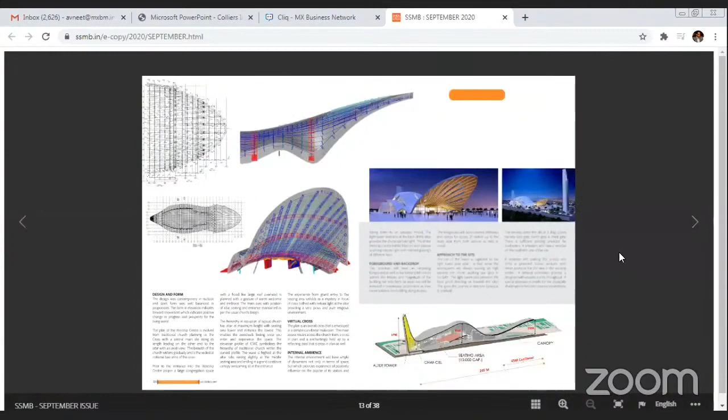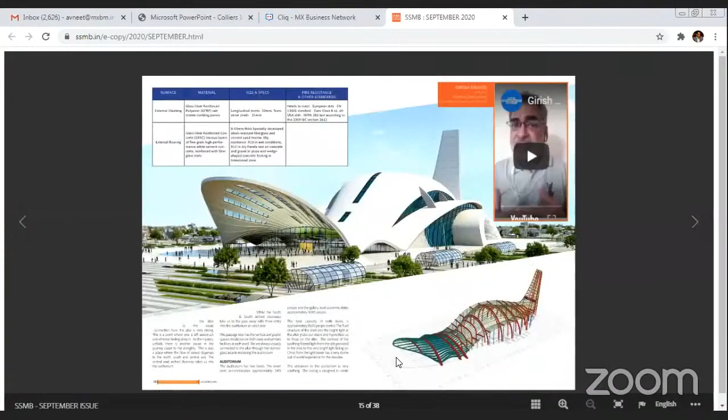Thank you. Good evening, friends. I must at the outset congratulate MX Media for coming up with this brilliant idea to have a webinar on industrial structures and the development so far. The speakers today are really a galaxy of experts from our country, which include Dr. Srinivasan, Mr. Pingle, and Mr. Murthy. So, good evening to you, sir.

Good evening to you. Friends, industrial architecture and industrial construction has really gone on a big journey over the past, let's say, about four decades or so. We had simple regular northlight trusses that we used to see in industries, regular trusses which are now replaced by portal frames and even advanced structures like space frames.

The AC sheets, which used to be a very common thing for roofing sheets, has been changed to Galvalume, Zincalume, and also sandwich panels. From conventional fabrication, we have now moved on to pre-engineered buildings with a tremendous amount of workmanship happening in the factory itself, and then the erection. We have the development of codes accordingly, whether national or international codes that we follow, which are correlated to the developments that happen as far as construction is concerned.

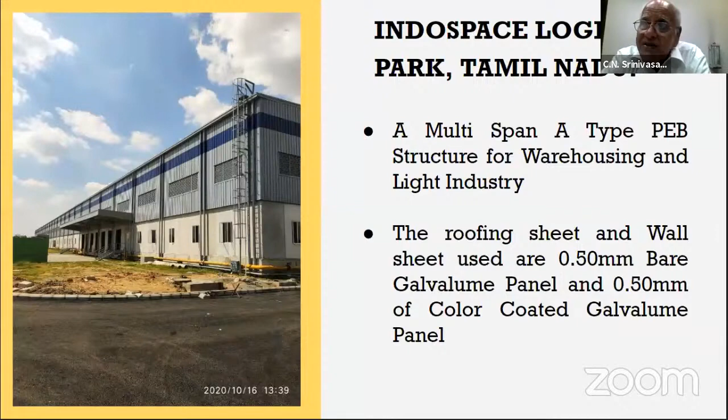Now, almost all warehouses are designed on the basis of MBMA standards. They do not follow the Indian standards. That would mean in terms of live load, in terms of wind load, in terms of the stresses, in terms of the serviceability limits.

Those of you who have had time to see that bulky National Building Code document, half of which is junk and the other half is fit to be thrown in the dustbin, it has some very penal provisions. The penal provision says that anybody who does not follow the National Building Code, or who prompts others not to follow it, is liable to be prosecuted, license cancelled, and debarred for life. Now, this is a clause which is draconian in nature and highly unenforceable. It's a meaningless threat.

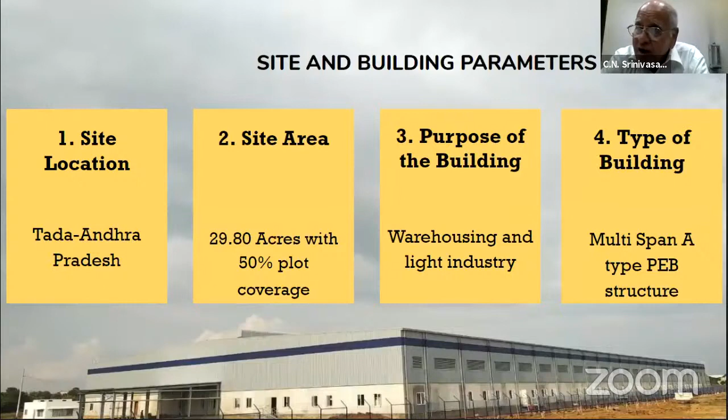Therefore, the steel design, fabrication, manufacturers, and end users should join a campaign to develop a special code applicable only to warehousing operations. I may say that over a decade back, the Department of Science and Technology and the Indian Standards Institution, or Bureau of Indian Standards as it's now called, were trying to develop a code for heavy industrial structures. Correspondingly, we should apply for light industrial structures. As far as education and research institutions are concerned, we should address developing a ready reckoner or typification of structures. Again, the Department of Science and Technology and IITs, particularly IIT Madras, brought out several handbooks on typification of industrial structures with crane, without crane, standardization, modular construction, and so on.

To the fabricators, what it would mean is that they should mechanize, reduce dependence on labor, standardize simple connections, and overall simplify the fabrication system so that at site not much of a high-grade technology is called for.

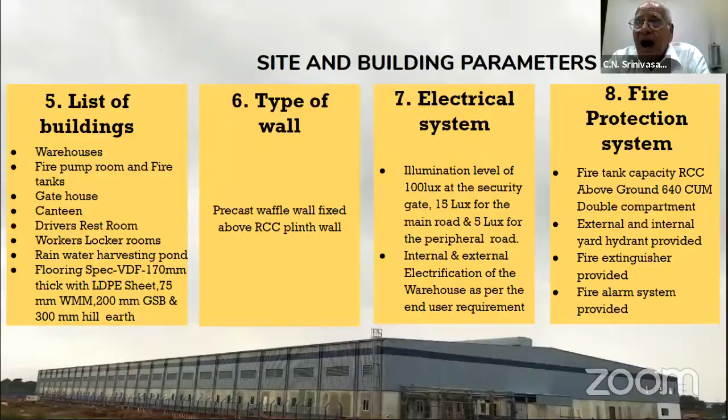Some of which is not entirely in our hands. Some of it is because of the atmosphere we are working in, some of it is because of the changing needs of the customer. And the life of the building, on paper, is at least 60 years. I have seen steel buildings that are still in place, built by our organization in 1947, doing wonderful work even today.

I thank you for a patient hearing, and I'll be happy to answer to the best of my ability whatever questions may crop up during the deliberations. Thank you very much.

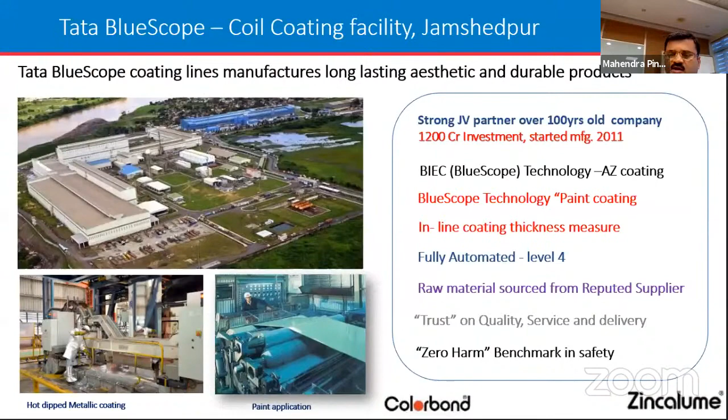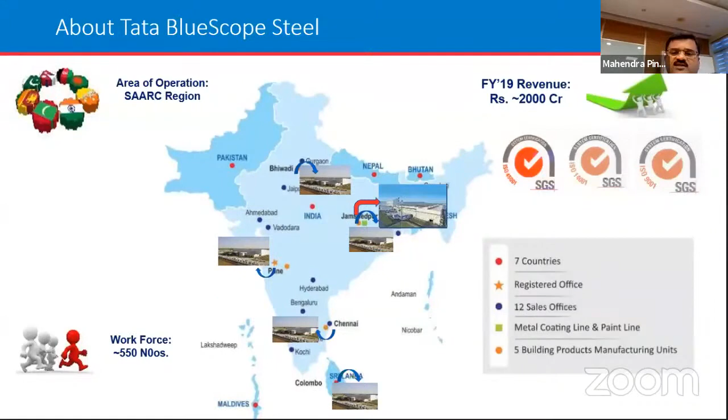We have roll forming operations around India - we'll not go into detail. The main plant is in Jamshedpur, where we manufacture Zincalume steel and Colorbond steel. Normally you can see most PEB buildings, or typically in projects, they go for Zincalume roofing on top as a roofing material.

People prefer color coated steel for wall cladding to give it more aesthetics. So what is this Zincalume steel? This, as I said, is invented by BlueScope, which is the BIEC technology, in 1976.

Zincalume steel has a differentiator. It is different from the galvalume or aluminum zinc color coated steel offered in the market. It has an anti-darkening property. So whenever you use Zincalume steel on the roof, it doesn't have the darkening property. It looks good, and the luster keeps for a longer time.

Because of that luster property, you can get more thermal reflectivity. Our Zincalume steel gives an SRI value of 63.

Speciality of our product is we can give equal coating on top and bottom side, so that whatever corrosive impact is generated during the process, or coming from outside, is addressed. Equal coating is very well backed with the warranty, so you will have peace of mind that there won't be any problem. Whatever happens in the future, Tata BlueScope Steel is always there to support on these things.

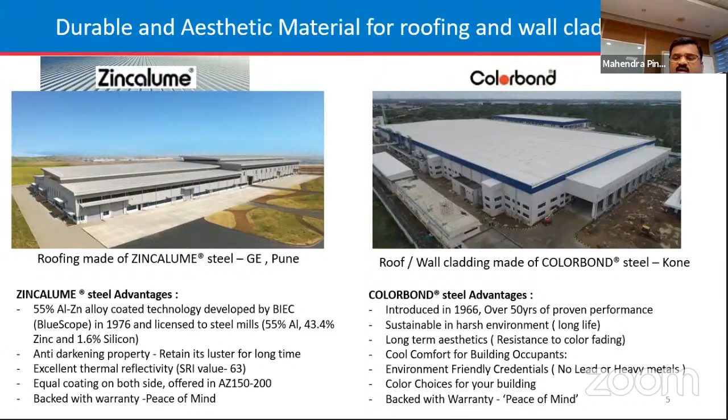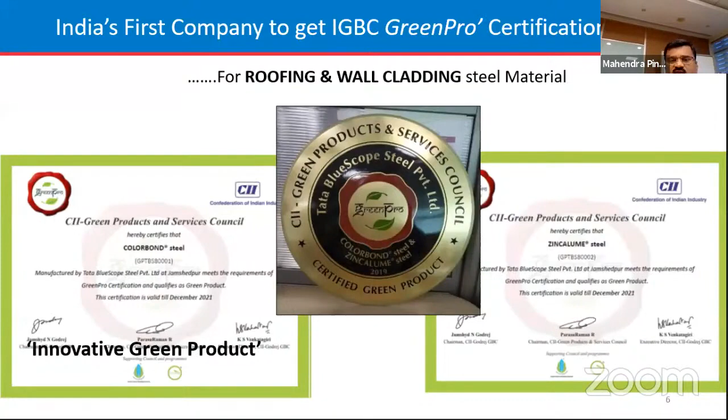Again, Colorbond steel has peace of mind, supported with warranties. As per green building points, the CII and IGBC certify products as green. In India, among color coated and metallic coated steel products, Zincalume steel and Colorbond steel have been the first green certified products, because of benefits like less or no lead content, being environment friendly, low VOC, and complying with green requirements.

Talking about architectural applications, metal cladding has to take care of whatever structures architects are designing. You can see this type of structure built in Australia with very stiff bullnose type curves, and the metal cladding is suitable for this, being pre-painted steel - that's Colorbond steel. Whenever you are curving or crimping, there won't be any problems in color performance or cracking.

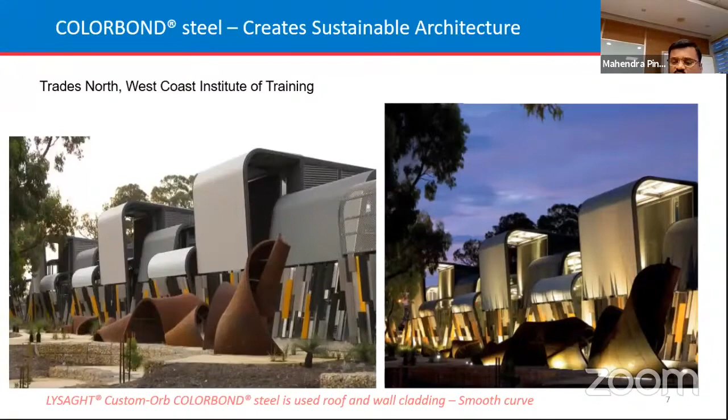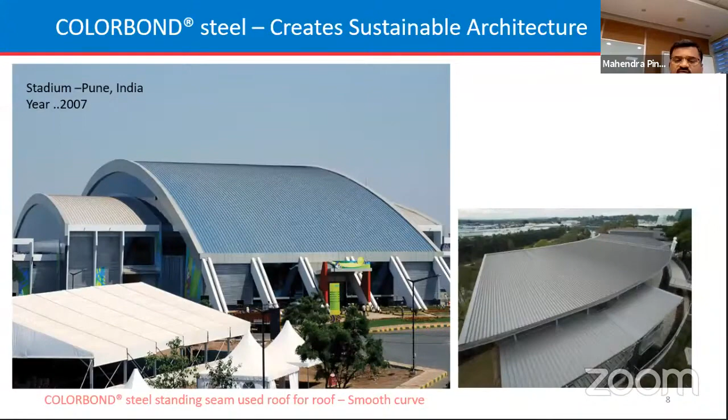So it gives good performance in flexibility. This is not limited to institutional use - it is also suitable for infrastructure projects, stadiums, metros, railways, all sorts of things.

Nowadays PEB buildings are designed not only as box structures. Architects are designing with concave and convex type structures, providing aesthetics by adding curvature that adds value to the structure.

Nowadays cyclones and natural calamities are happening, with wind speeds going to 200 plus kilometers per hour, and there are different types of cyclones India is seeing nowadays. In such cyclones, metal cladding, as Sir mentioned, can blow off. So there is a requirement for material with inbuilt strength - the cladding material has to be very strong.

It has to be strong into that. That's why you can go with a high rib type of profile, or locking type of profiles, or standing seam type of profiles. The profile has to withstand that type of pressure, wind pressures.

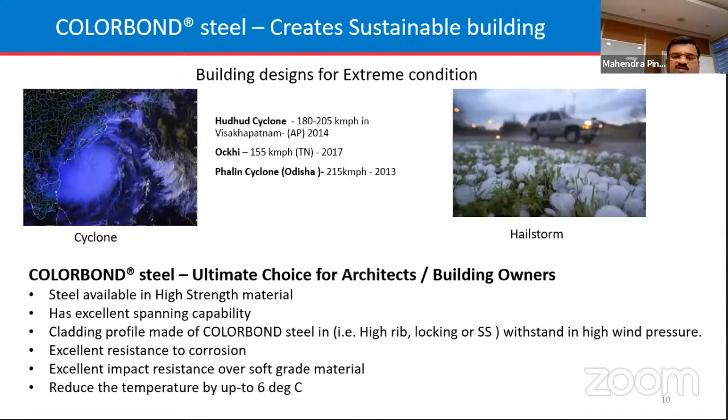And whatever Colorbond steel we are offering, it is sustainable, and it protects the investment whatever is there inside. So it is sustainable buildings by using Colorbond steel.

Other than that, this industrial sector, this is severe marine or industrial type of environment, or heavy industrial sectors where fumes are generated, sulfur dioxide coming, different fumes are generated. Then in the coastal areas, where there is high content of chlorides, the material has to withstand.

We have the product called Colorbond Ultra, which takes care of severe environmental conditions and gives higher durability of the product. It has a special treatment given on the Zincalume steel, which has high content of strontium chromate in the primer, and the paint is also specially designed to withstand high UV and these things.

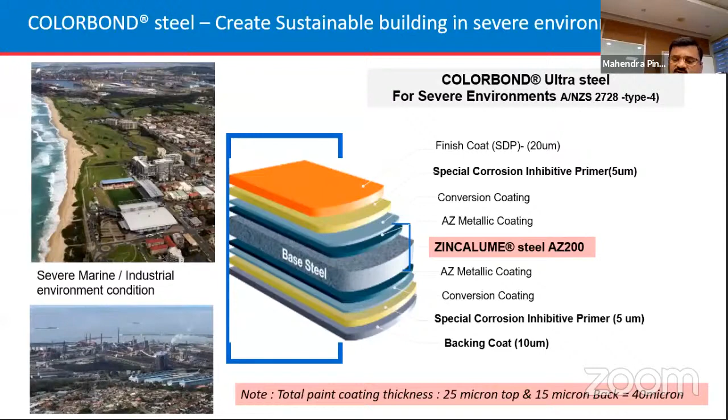Talking about sustainability, nowadays so many buildings are built for more than 20, 30, or 40 years, so the cladding has to be replaced.

Nowadays people talk about replacing the existing roof with new material, so you don't need to remove the existing sheets. You can go with retrofitting, putting new sheets with insulation or other things on top of it. So you can protect your investment, eliminate the tear-off of your old roofing material, and reduce the amount of wastage going into landfills.

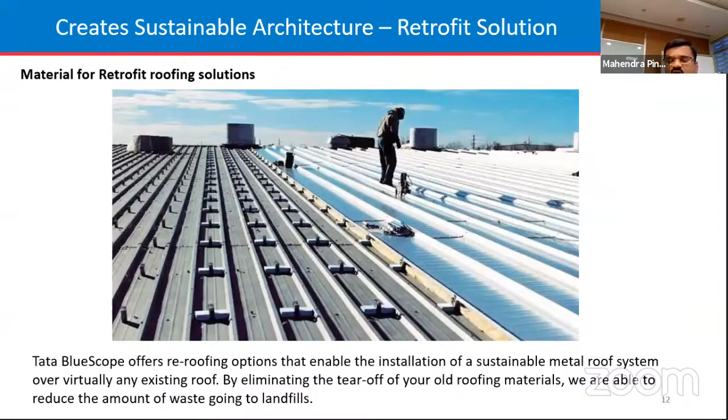So this sort of thing is very prominent nowadays. Colorbond steel gives durability - excellent corrosion resistance and excellent color fading resistance. So you can talk about the aesthetics.

We talk about 20, 25 years, but we give a warranty for 10 years. Not only limited to 10 years, the product can withstand more than that. So that is what Colorbond talks about regarding aesthetics - you will have the color performance for a long time.

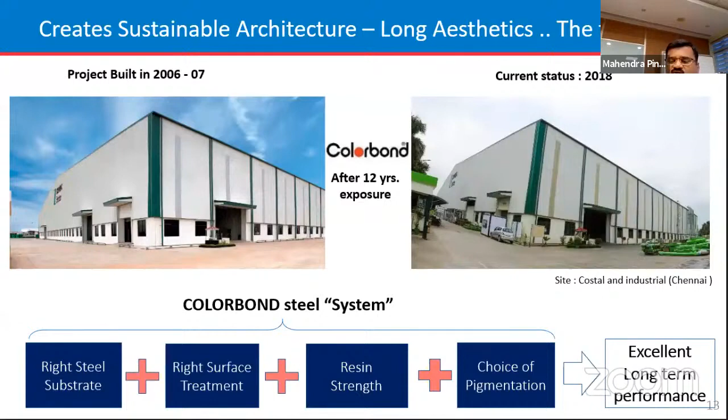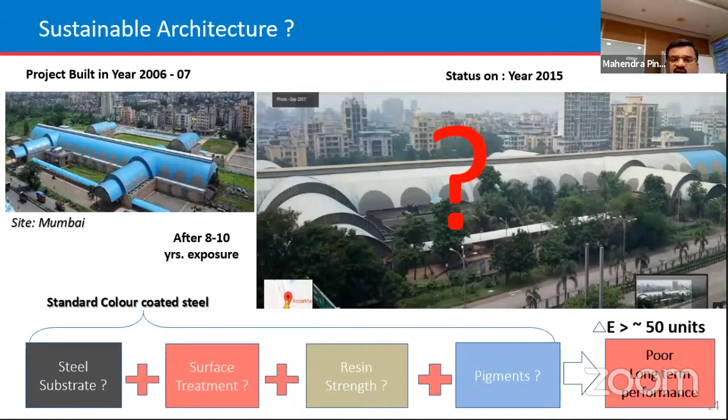So the alternative, or option, to that is Colorbond steel, which does not have any problem over a period of time.

Excuse me, Mr. Pingle, I think we are running short of time. Yeah, we'll finish in 5 minutes time, sir.

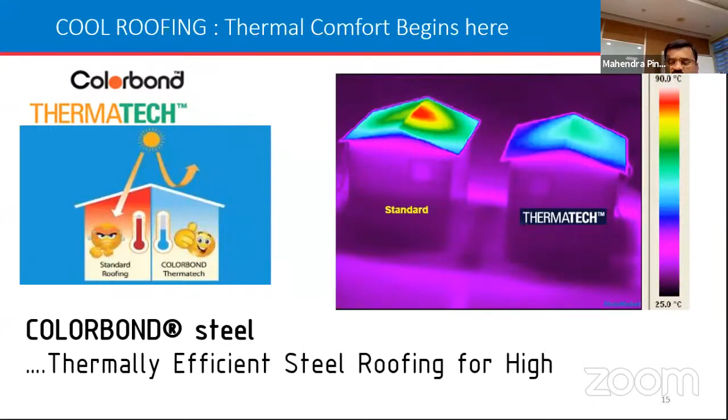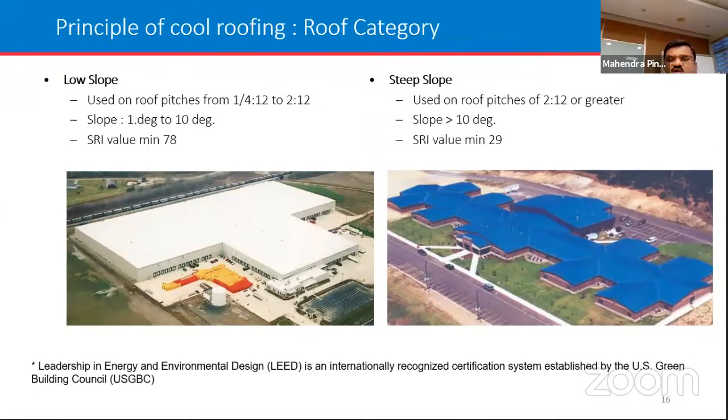So this sustainability is about the Thermatech technology, we talk about cool roofing. You know with cool roofing, the SRI values - if it is a low slope building, you have to have 78, and if it is steep slopes, the SRI value has to be minimum 29. Color bond steel complies with that.

So the phenomena of cool roofing is higher reflectivity and higher emissivity of the product. You will get lower heat gain inside the building. That's the white body, black body concept - this is actually the purpose behind it.

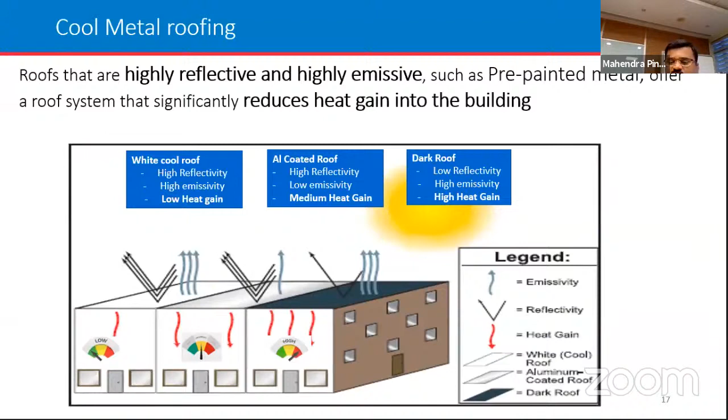So if you compare Colorbond steel with other material, you can see the white color here with the Surfmist and the ordinary color. Our SRI value is 87, and ordinary color of similar matching is 75. If you convert this SRI value into roof sheet temperature, Colorbond will have a 5-degree difference between the ordinary color and our white color.

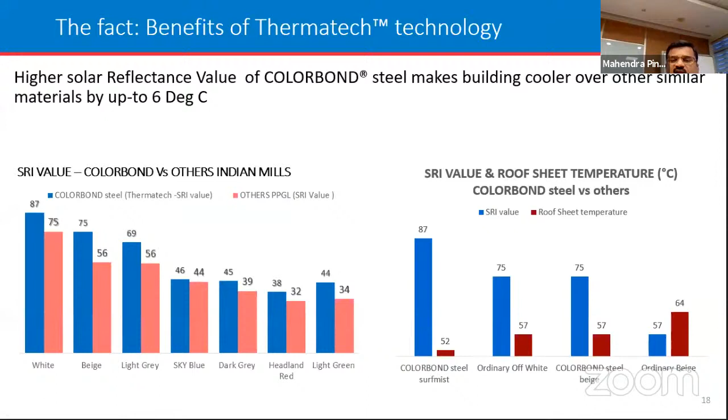Similarly with the beige color, the ordinary color has a higher temperature than Colorbond steel. So this is what the Thermatech technology in Colorbond steel gives - about 5 to 6 degree difference, and you can have 15% electricity saving.

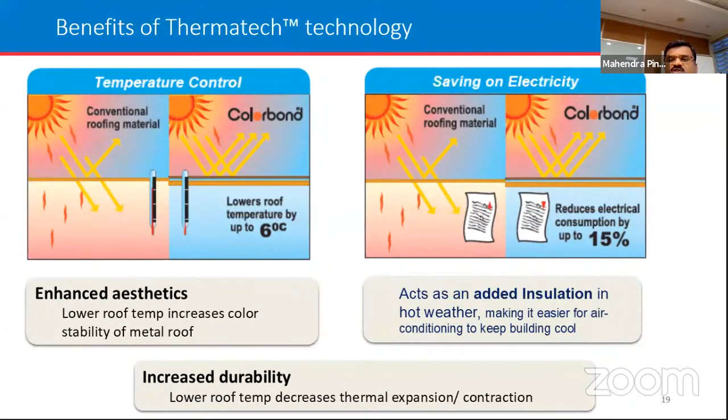Because of the lower temperature the sheet is getting, you will get lower thermal expansion and contraction. So with lower thermal expansion and contraction, the roof sheet durability is very high. It can last longer regardless of the temperature.

Talking about green building, you can see it's energy efficient due to the higher SRI value. If you go for green certification, that will give approximately 4 points. If you talk about material conservation, our steel is 100% recyclable, provides long life, and low maintenance.

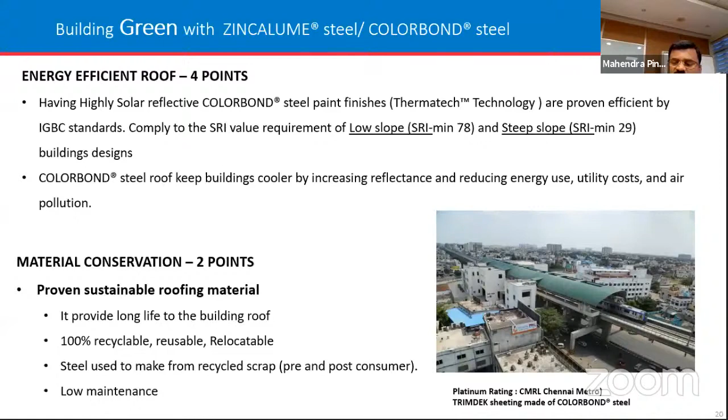We are using scrap during the manufacturing of the steel. So whenever you comply with that, you will get 2 points, and COLORBOND steel or ZINCALUME steel complies with that. Talking about water conservation, environmental quality and occupational health, that contributes 10 points.

COLORBOND steel doesn't have any lead pigments or hazardous chemicals in it. It does not release pollutants. And since it is made at the factory in Jamshedpur, while your building sites are in various locations, local air quality issues are not there. This normally happens in field painting, but in COLORBOND steel it never happens.

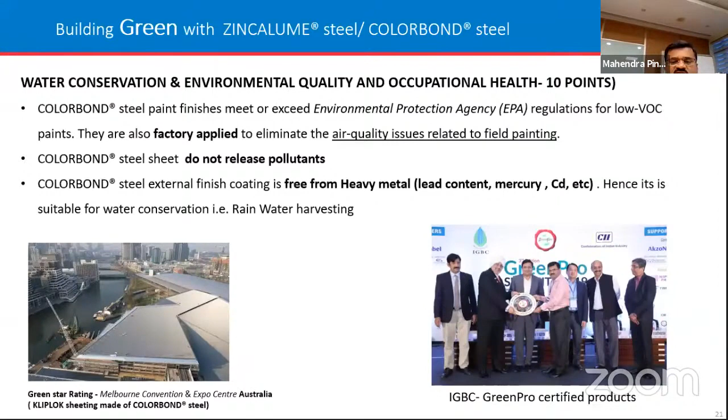So it is a green star rating building, which is there in Australia, a 6-star rating. So we got this surface.

Talking about the end of the presentation, Tata BlueScope Steel, BlueScope, and Tata Steel always talk about sustainability and innovation. What is meant by sustainability? It's about social responsibility, environmental responsibility, and socio-economic responsibility, and all three factors have to be balanced to have balanced performance, and that's how the product has to be developed.

If you talk about the social part, society is an important part of it, along with product development, product responsibility, labor practices, and human rights. If you talk about environment, there is energy, water, material, emission, effluent, waste, and transport, all important parts of it. If you talk about economics, direct impact, market presence, and procurement practices all come into economics. If all three factors are balanced, your product will be sustainable.

It's talking about the life cycle: get, make, use, and next. If you get the product from the right source, design it, use it in the building, then you can recycle it. That is what get, make, use, and next means.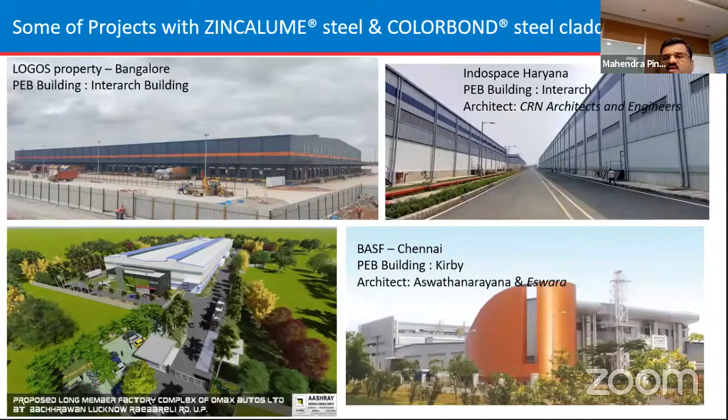And IndoSpace, CRN Architects, and all these firms are valuing the importance of cladding materials. All the architects now know the importance of cladding material in buildings, which is really nice, as they are considering the right product for their buildings. And that's the end of my presentation.

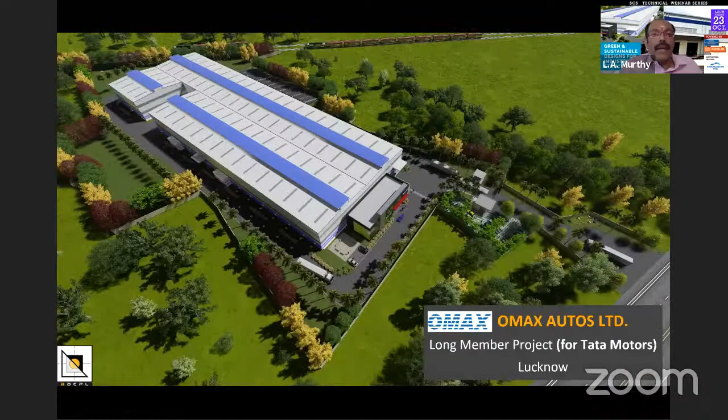We have recently completed a fully automated long member project for Omax Autos Limited at Lucknow to fulfill the requirements of Tata Motors.

This is the architect L.A. Murthy. I have done my bachelor's from MANIT Bhopal and EPBM from IIM Lucknow. I started my career with an esteemed steel building project for Maruti Udyog Limited, Gurugram, way back in 1991. Subsequently, I founded Aashray Design Consultants Private Limited, popularly known as ADCPL, based in South Delhi.

ADCPL was founded in 1991. As the managing director, I have been mentoring and guiding my team for the past 30 years. We have handled more than 400 industrial and warehousing projects on a pan-India basis in the past 3 decades. Some of our prestigious clients include Omax Autos, JBM, JSW, Tata Motors, Hero Motors, Munjal, Sandhar, Caparo, Kailash Vahan, DispoSafe.

Mahesh Edible Oil, and MNCs like Suzuki, Yokohama, Daikin, Jiken, Bata, etc. Since we also have Tata BlueScope in this panel, we would like to candidly share that we are their sheeting's largest consumer in Northern India since 2006.

Today, we are going to showcase one of our esteemed projects, the Omax Autos Long Member Project. Omax Autos Limited is one of the reputed automotive component manufacturers in India. They decided to set up an exclusive, fully automated plant for Tata Motors to manufacture long members for trucks and trailers. As per the internal process flow for setting up the entire manufacturing unit, the primary requirement was a 200-meter long shed in 2 bays of 30-meter width.

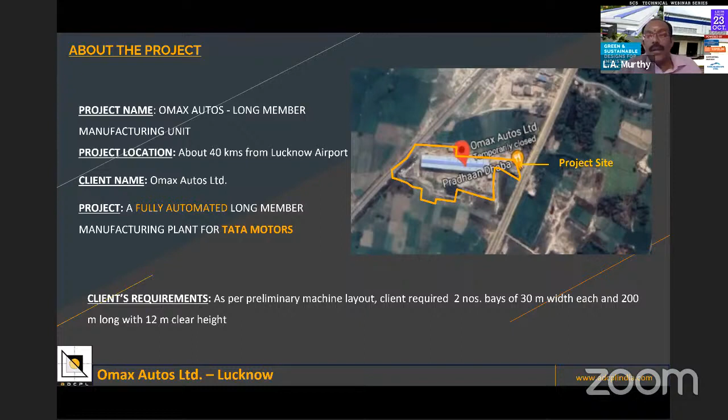That site is located on the Raebareli Highway, about 40 kilometers away from Lucknow Airport. The site area is about 9 acres and a built-up area of 1 lakh square feet is completed in phase 1. The second phase of 50,000 square feet is in progress. Our scope of works in this project includes architecture, structure, plumbing, firefighting, interior, vastu, landscaping, automation, green building, and project management.

We assisted Omax Autos with various approvals. Now let's start with the architectural design part.

We had associated with Omax Autos right from the land acquisition phase, based on their requirement and multiple land bank options with various constraints. We explored numerous conceptual schemes and finally we ensured the selection of an appropriate site location, then developed a schematic sketch considering all the relevant guidelines. The particular land parcel is located between the National Highway and railway lines.

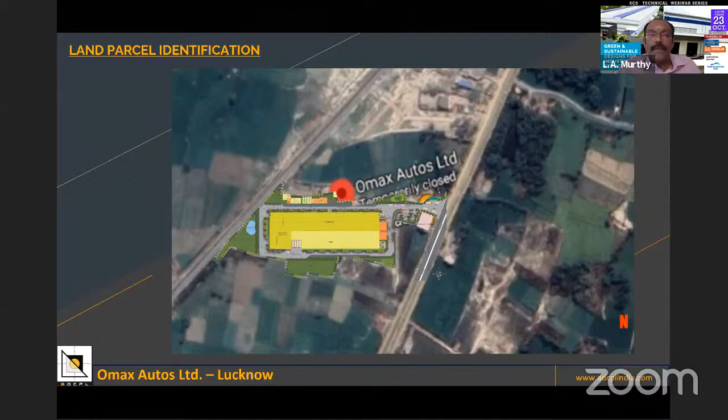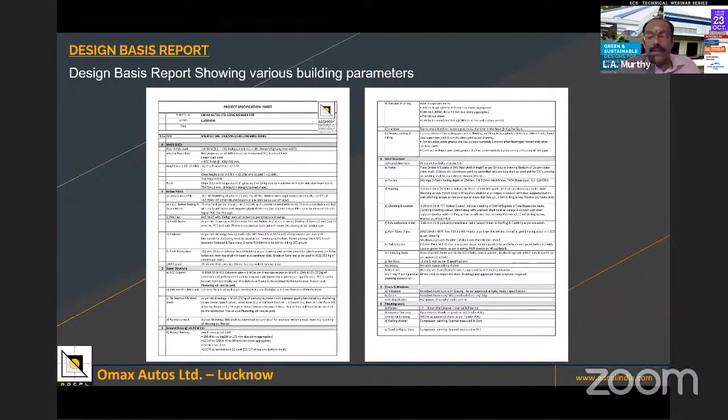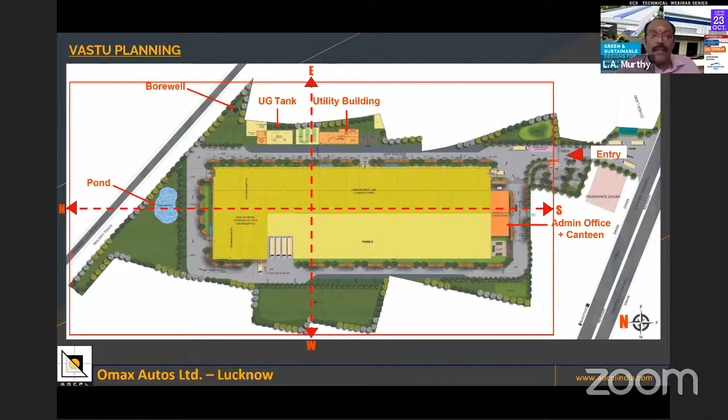The weighbridge along with the control room is ideally planned next to the main entrance for better control. The driver restroom is planned adjacent to the guard room so that drivers are in the vigilance of security guards at all times.

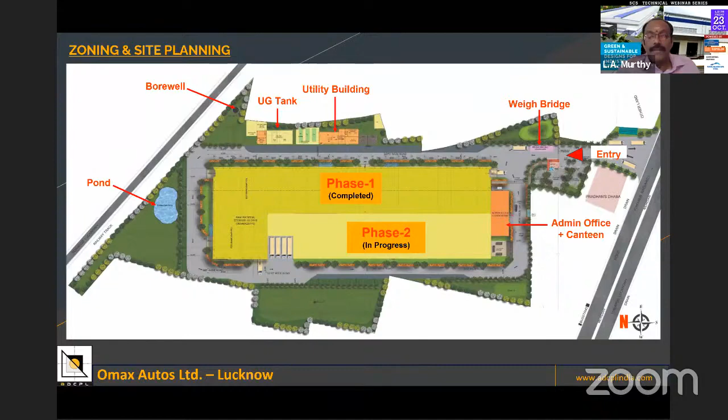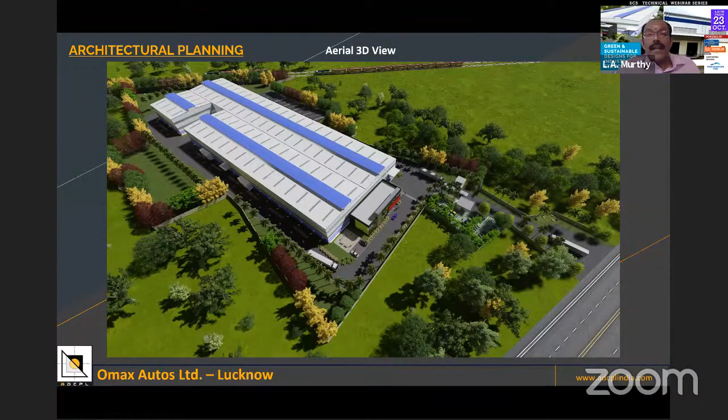As per the client's vision, we have done landscaping throughout the site, right from the shading trees in parking areas to the aesthetic palms in the entrance avenue. We have also proposed an orchard in the rear side of the plot.

Some more views. The parking area has been defined on the left side of the entrance. The weighbridge and guard room are also visible in the view.

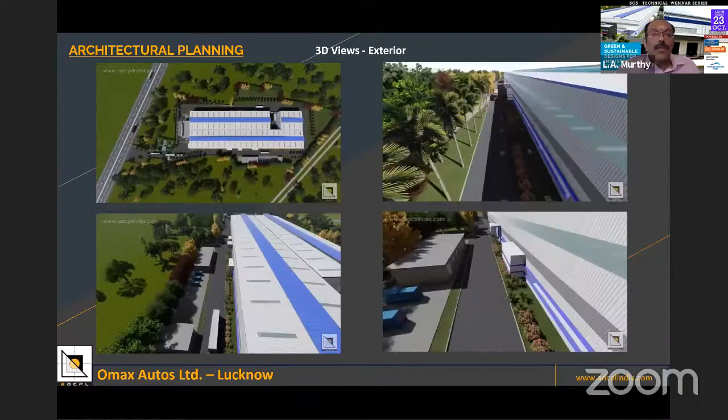Some more 3Ds. As a part of comprehensive designing, we designed the admin block interior as well. We have designed a double height space in the reception to give a grand look and introduce some pleasant materials with good detailing.

For the canteen, we wanted to give a vibrant look while keeping the economy in mind. Therefore, we kept the ceiling and services exposed and introduced multicolored seating. We also planned a green wall and printed vinyl wall coverings to enhance the ambience of this canteen.

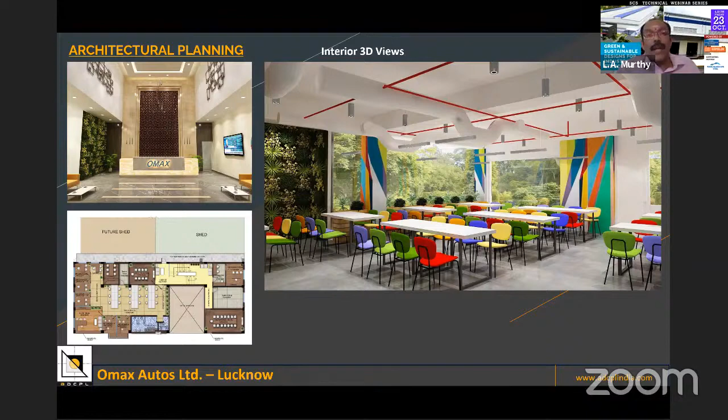The OMAX project team was very specific about the long trailer maneuvering within the plot, considering the narrow entry from the highway. The trailer circulation within the site is designed for unidirectional movement. Accordingly, the truck will have to take reverse only once for parking.

This will help in minimizing hindrances and traffic snarls and ensure smooth flow of vehicles. We have used simulation software to ensure the long trailer movement in various turns. This helps in optimizing the road width, turning radius, etc. A glimpse of its final output is shown here. An efficient vehicular movement within the site can certainly contribute towards sustainability.

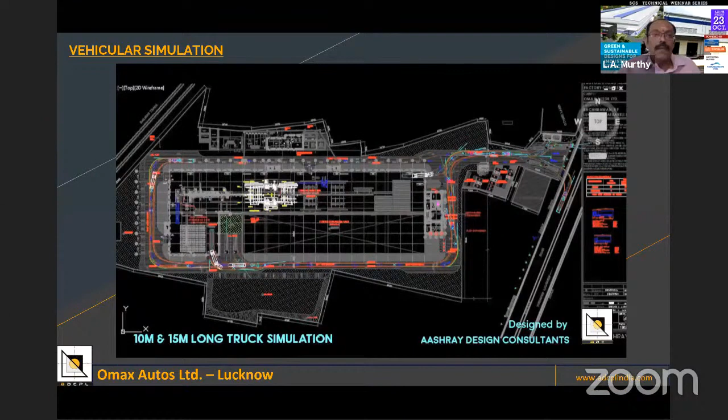Before starting the design work, we should understand the complete material flow and the process. In bay 1, raw materials are stored and transferred through car coil from bay 1 to bay 2. Through the crane, it will be loaded onto the rolling mill.

From the rolling mill, the flow will go to the punching machines and plasma cutting machines planned in both bays 1 and 2. Half of the materials from the rolling mill will move to bay 1 in a straight line, and half will move to the transfer bay to bay 2.

The L-shaped building itself is a complete one cycle. The future expansion will take care of an equal amount of production in the second phase. By removing a column, a transfer of long members from bay 1 to bay 2 from the rolling mill can happen to double the production. Similarly, the finished long members can be stored in the bay 1 FG store.

Some materials which are to be painted in this plant itself will move to the paint shop, and others will be directly routed to the bay 1 FG area. For the transfer of material from bay 1 to bay 2, we have to remove one column, as OMAX required a 17-meter wide column-free space. We have removed a column to attain the same. In the following slides, we can explain this in detail.

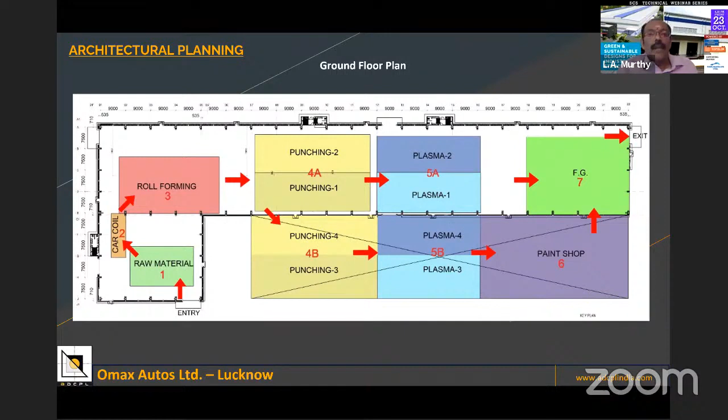This is the cross section of the building. The machines are about 5 to 6 meters with the transporters and floor-mounted gantry for integrating one machine with the other. Considering this, the clear height requirement of the shed is 12 meters.

Since the shed is made with a double ridge, the water drainage from the center of the shed was challenging. We prefer that there are no pipelines below the shed floor. Hence, we have introduced a suspended header pipe by making slits in columns at different levels. Considering the slope of the header pipe, the water from the header pipe is drained at the front and rear gable ends.

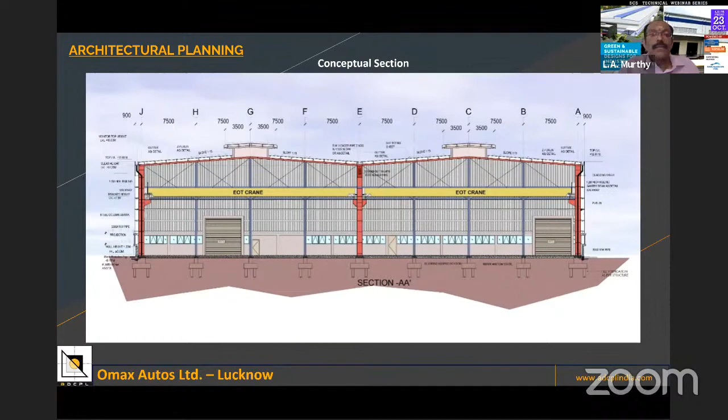Another detailing we normally follow is plinth protection. Normally we find cracks in the plinth protection. We prefer to go for a cantilevered plinth protection from the plinth beam, which takes care of that. It's quite an economical option in most cases when we have to go for a 2-meter filling at sites.

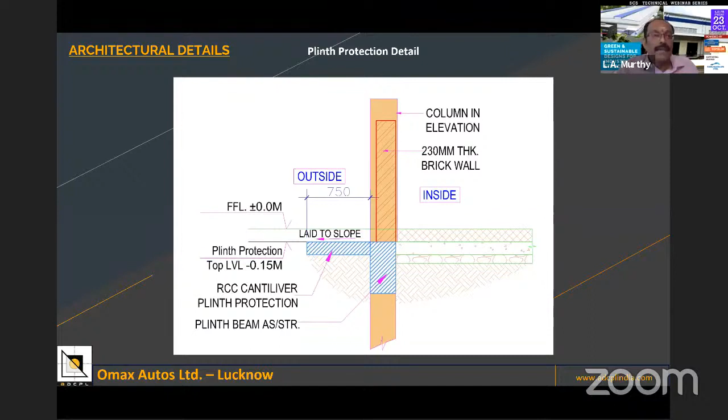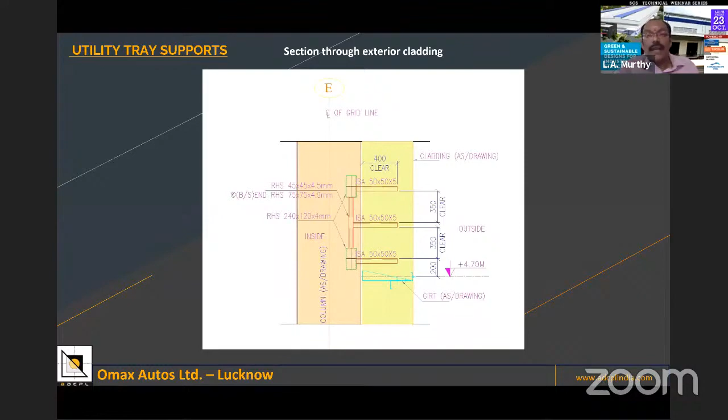We have planned to keep the water line, gas line, firefighting pipeline, and electrical cables all running in between the cladding sheets and the steel column. This gives a clutter-free look to the shed interiors.

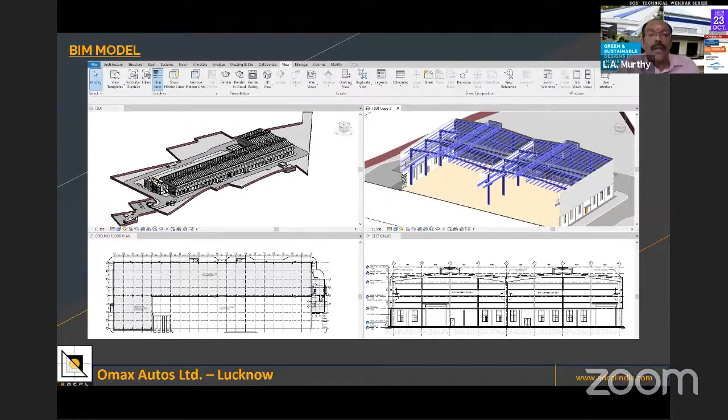We have developed both the main structure and building services on BIM and ran it on clash detection software to make sure there are no clashes. We have also used BIM for preparing the bill of material. BIM for sure helped us a lot in this project.

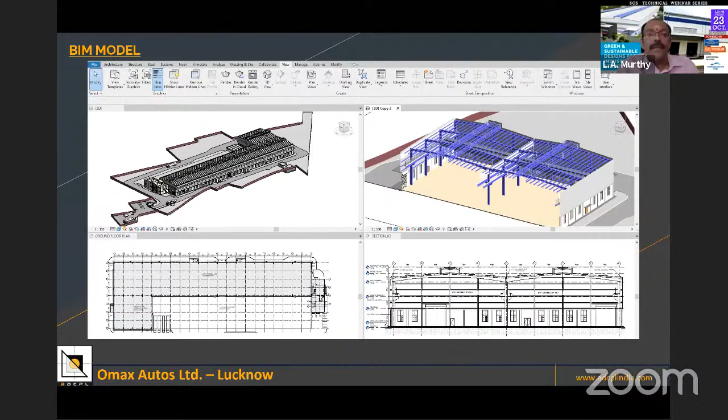Now let's move on to the structural part of the presentation.

Steel OMRFs are used along the width of the shed. Here, a double pitched roof in multiple spans worked out to be more economical compared to a common pitched roof for both spans. Flange braces are used to support the main frames in the lateral and torsional directions. Portal braces are provided at selected braced bays below the 7.5 meter level to accommodate the requirement of rolling shutters at those locations.

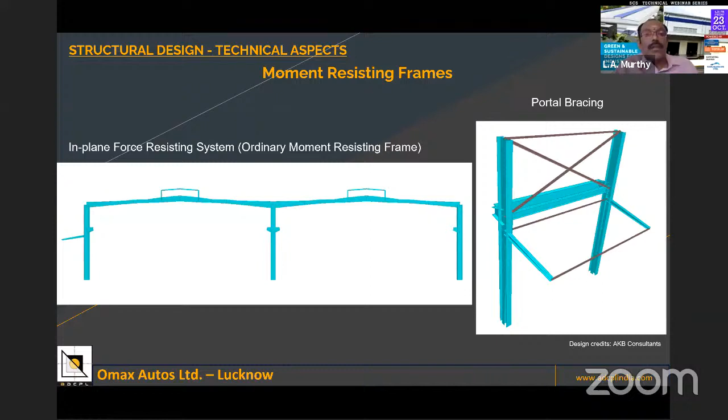Steel OCBFs are used along the length of the shed. The location of braced bays is such that they effectively overcome the discontinuity in the structure due to functional requirements. For bracing members, we have used tube sections and avoided rod sections, as we have heavily loaded cranes and large spans which lead to higher peak drifts and lower energy dissipation if slender sections are used.

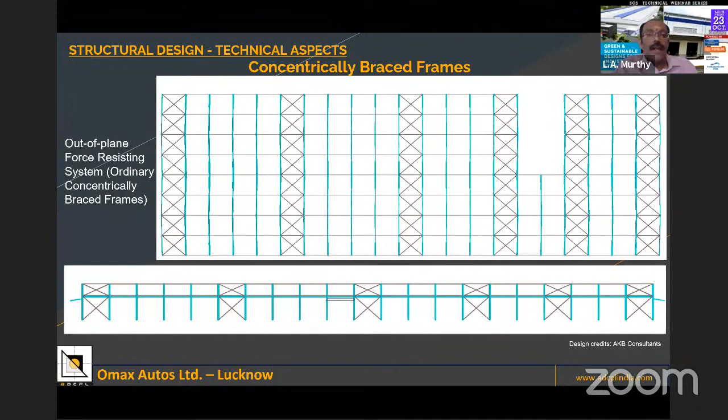As recommended by the soil consultants, we have designed the pile foundation with 400 mm dia under-reamed piles, 10-12 meters deep. The tentative tonnage breakup works out to a heavy building of 4.5 kg per square feet.

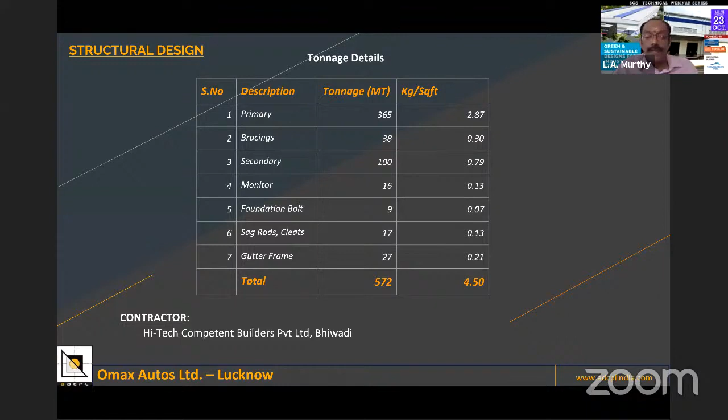Let's now look into the sustainable design aspects of the project.

The site planning is done such that we could retain the original topography of at least 25% of the plot area. In order to minimize the heat island effect, we have planted more shade-giving trees and covered the open area as much as possible. The roadside and parkings are covered with shade-giving trees.

Apart from this, we have considered white paint on the admin building terrace and white color-coated Tata Blue Scope sheeting on the shed roof to reduce heat gain.

In order to avoid soil erosion, we have done surface treatment throughout the site by means of roads, pavers, and landscaping elements, etc. Various provisions were also considered in our planning for differently abled persons.

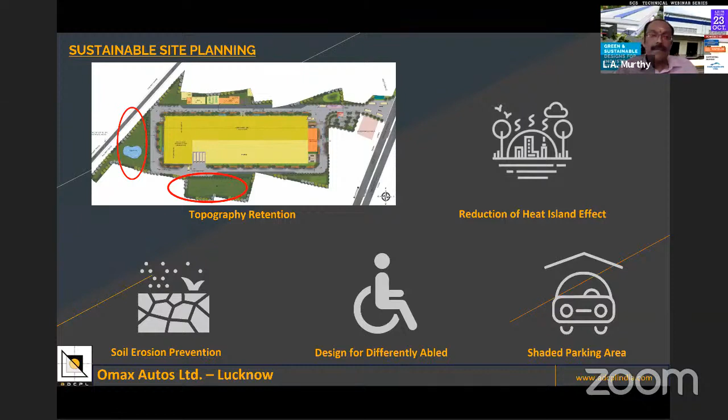Water conservation through rainwater harvesting: more than 95% of rainwater is planned to be harvested using rainwater harvesting tanks and a rainwater harvesting pond. In order to handle unprecedented rainfall like we had in the last rainy season, a special arrangement is done to collect the excess water and pump it to the nearby culvert.

We have taken necessary steps to conserve water in the following ways: low flow rate faucets, urinals, WCs, showers, etc. were used to conserve water spending. Treated wastewater is planned to be used for landscape watering, and ETP treated water is planned for toilet flush.

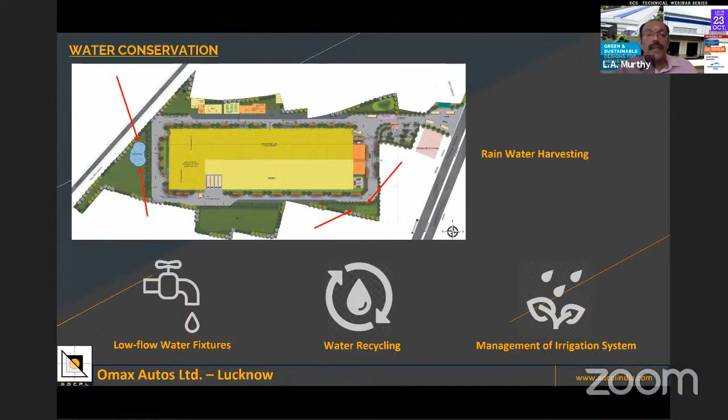Regarding energy conservation, natural light is planned to be used as much as possible to reduce artificial light usage. PC sheets for natural lighting are considered for about 10% of the floor area, provided in the roof as well as in the elevation. The PC sheet locations are planned such that both shadow and glare are minimized, which also improves the working environment.

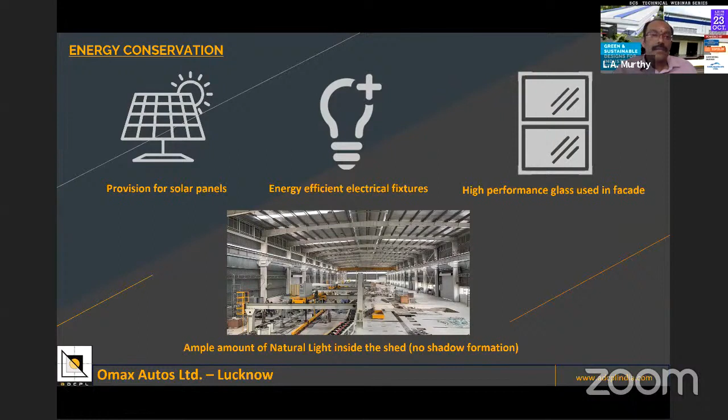Now for material conservation: we have used PPC cement throughout the project, which contains fly ash. The usage of fly ash content in cement helped in obtaining additional credits for the green building rating.

We have planned to use local materials as far as possible - pavers, RCC pipes, and precast panels for the boundary wall - procured from local manufacturers. For effective solid waste management, multiple bins were provided.

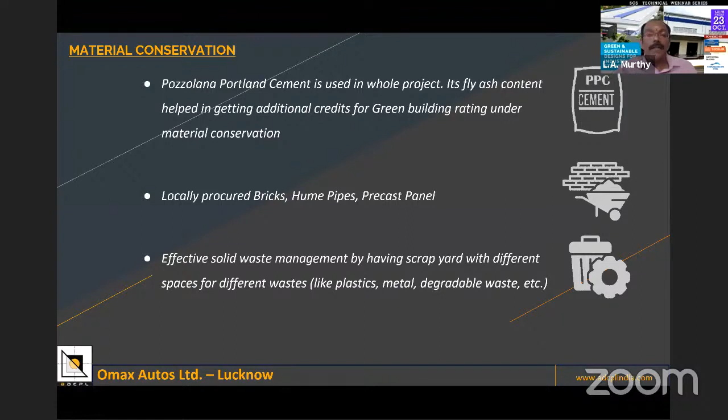For quality of working environment, low VOC paints are used everywhere as per IGBC norms. Breakout spaces, gyms, and recreational areas in the admin block are considered to avoid fatigue in the workspace, along with the use of PC sheet and high performance glass already discussed.

Ridge ventilation with louvers takes care of the client's requirement of 20 air changes per hour. The ridge monitor adds as an element to the elevation and, importantly, traps the hot air at the top, making the air changes happen automatically. We have used UP Twiga glass wool in the roof as thermal insulation.

Now some key challenges we have faced: since our approach is from the National Highway, the norms of the National Highway had to be followed. Accordingly, a 500-meter long service lane was designed and is being constructed. Slushy soil and poor SBC, along with a higher water table almost 1 meter below the NGL, were big challenges. Multiple machine foundations had to be designed for automation.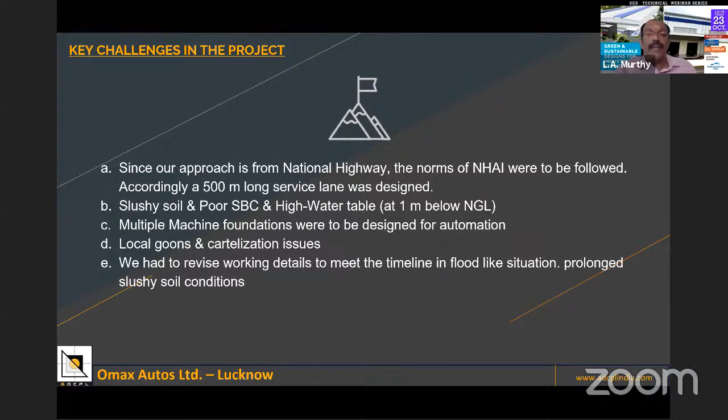Local goons and labor issues are common in UP. We had to revise working details to meet the timeline amid flood-like situations and prolonged slushy soil conditions, etc.

Now, the differentiating aspects of the project.

In this particular project, we have gone for on-site fabrication of the PEB look building. The advantage of on-site fabrication is we can almost save 15% of the primary members' weight by avoiding connection plates and HT bolts in the site fabrication system.

There is flexibility in working because PEB vendors require 100% clearance prior to the start of fabrication. On-site fabrication helps in attaining greater flexibility of work.

In case of PEB, every vendor has their own fabrication standards. In case of future expansion, there are chances that the owner may have to approach the same PEB vendor only. With on-site fabrication, there are no such constraints during future expansion. Utilities can be planned and installed according to the requirement, and strengthening can be locally done.

Some challenges we face in this: we have to assure the quality of welding through dye penetration test and ultrasonic waves testing at site. For quality of materials, we depend on MTC, and it will be checked at regular intervals, and we have to get the local testing done at regular intervals.

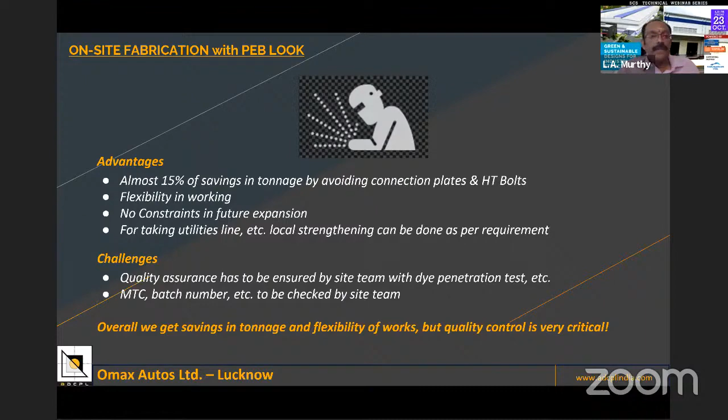In order to ensure the long member transformation from one bay to another bay, the gantry is designed for 18 meters long. Since the sheeting works has to be done to cover the shed, a temporary column is placed in between for sheeting works to happen in the first phase.

At the time of phase 2 works, the temporary column will be removed once for all. For resting the portal, the stub column is supported over the gantry. The 18-meter gantry was really a challenging one here with the heavy cranes.

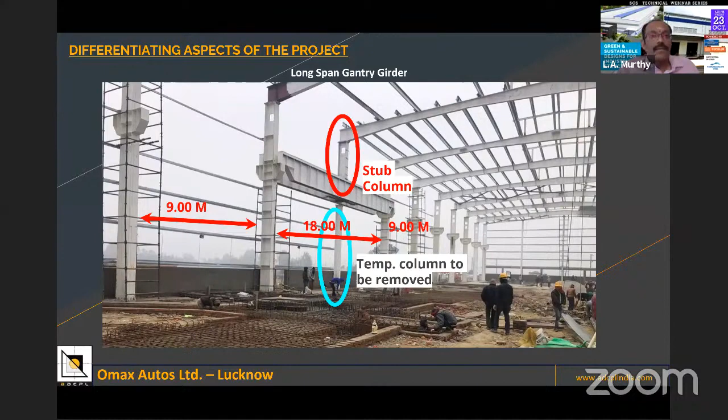This is a cost summary. The total estimated budget was 27 crores for the construction of 1.5 lakh square feet. The overall building cost is approximately 16.5 crore at the rate of 1100 rupees a square feet for the construction of 1.5 lakh square feet.

Development works like road, boundary wall, STP, weigh bridge, foundations, landscaping, etc., costed almost 4.75 crores. Building services, like electrical, plumbing, firefighting works, including admin block interiors, costed us almost 5.75 crores.

Our major cost reduction factors were the structural design and detailing done by ADCPL, which reduced the cost. The complete PEB design was done by us; only the fabrication drawings were done by the fabricator. On-site fabrication reduced the cost of construction as explained in the previous slide. The double ridge roof also resulted in overall cost saving.

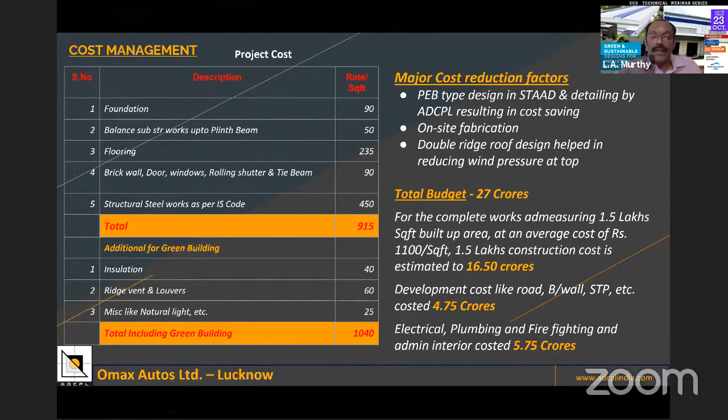Again, BIM. We have used BIM to design the building as discussed in the previous slide. The building modeling is done in Revit software along with the services, predominantly to detect the clashes in services routing and structure. For green building, the design was done considering several sustainable design factors listed by IGBC.

OMAX has planned to obtain green building certificate for this project. Documentation for getting approval will be done through our channel partner, Godrej and Boyce.

Lastly, we would like to cover the fire tank at the ground level. Normally we see underground tanks are always below the ground, but in this particular case, because of the soil, the underground water table is very high, and the water pressure is very high. We have designed the tanks partly below and partly above, so that we could avoid the extra piles happening there.

Vehicular simulation was done in order to optimize the road width, turning and radius, to ensure smooth traffic flow. Vehicle simulation software was used in designing roads and green belts around the shed. We would like to see a small video.

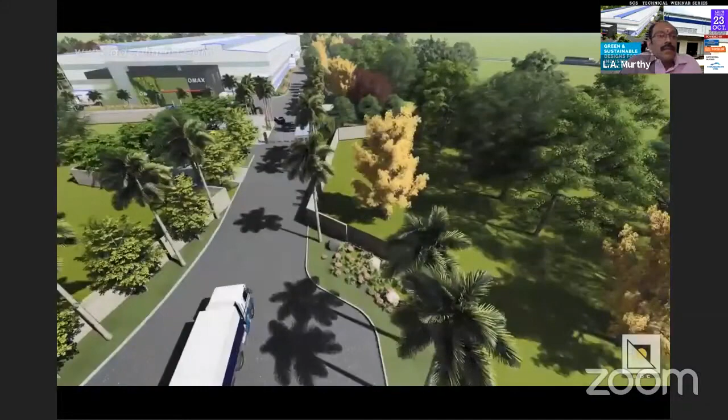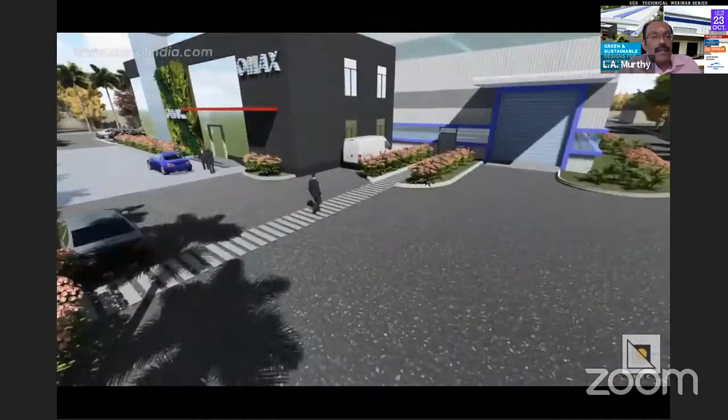You can see the weigh bridge, the pedestrian walkway, a zebra crossing, defined man movements, the staff parking. The toilet blocks are outside the highway area — these are the toilet blocks. These are some truck parking areas, and all the utilities are placed near the boundary, so there is a gap between the main building and the utility building. Again, the toilet blocks on the other side.